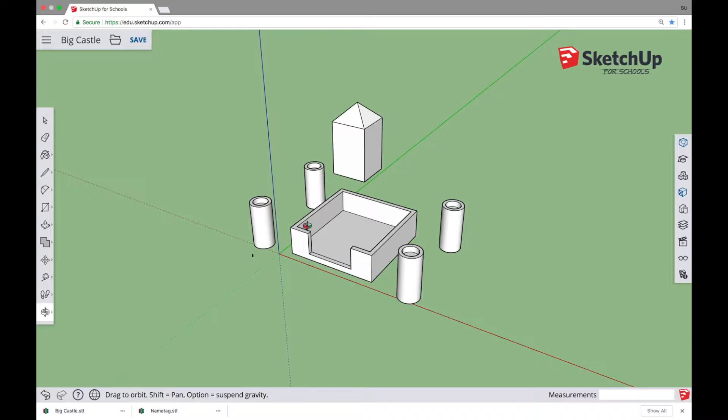Hello everyone. In today's lesson we're going to be drawing this castle. This castle is a little bit different than other models we've done in that it's a multi-part model. We're actually going to be drawing each individual part and then combining them together to make our castle so we can 3D print it.

In this lesson we're going to assume that you already know where most of the tools are and how to orbit and navigate comfortably. If you don't, you should go back and do some of the previous tutorials so you're comfortable. In this one, we're going to move right along and get to building our castle.

Let's do it. First things first, we're going to do a Save As and save this model, and we're going to call it Big Castle, and select a folder in your Google Drive to save it. This way we won't lose any work as we go along.

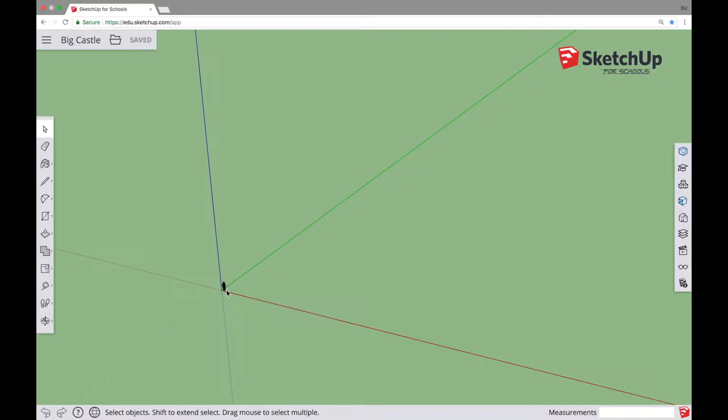Next, I'm going to start making the base for the castle, and we're actually going to make a pretty big castle, one that Temple could fit inside. So I'm going to zoom way out so Temple's really small. I'm going to get the rectangle tool here and click and release and draw a big rectangle or square and click again. We're eyeballing it here, but we want a castle big enough for Temple to fit inside.

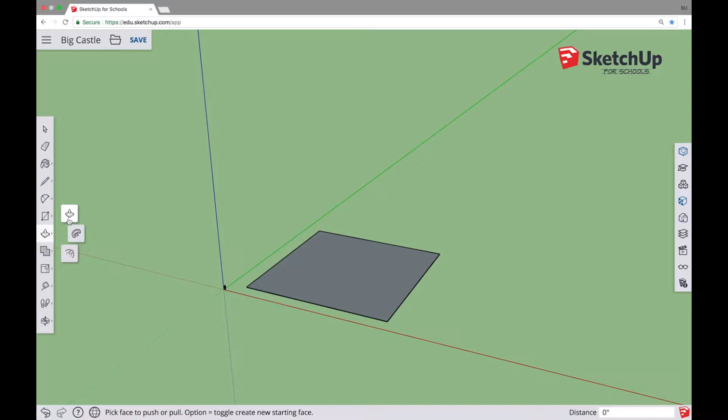Next, I'm going to get the push-pull tool and click and release on that rectangle that I drew and click again. That's going to make the rectangle that's going to make up the base of our castle.

Next, we're going to click the offset tool. We're going to go to the edge of the top of the rectangle, click and release, and click again so you offset a little line inside the castle.

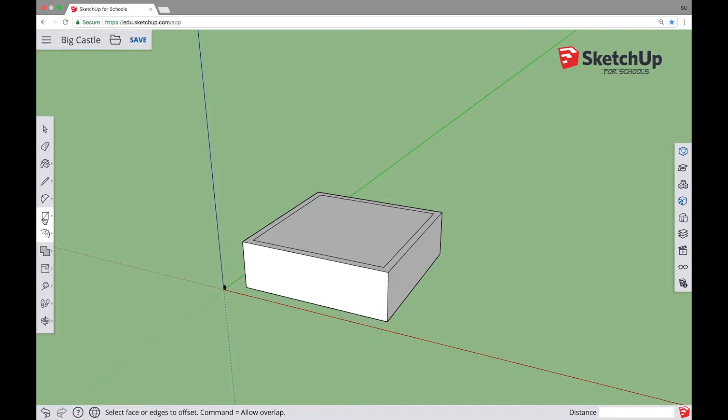After that, we'll go find the push-pull tool, click and release in the middle, and push down that top surface and then click again. You don't want to go all the way through, but go down a significant amount like you see here.

Next, I'm going to use the orbit tool, and I'm going to orbit so I'm kind of looking down at the top front of the castle like this. I'm going to combine the zoom and the pan tools to sort of move the castle in view.

Next, I'm going to take the rectangle tool and click and release in the bottom left corner of the top of the wall and the top right corner on the top of the wall to create a rectangle like this.

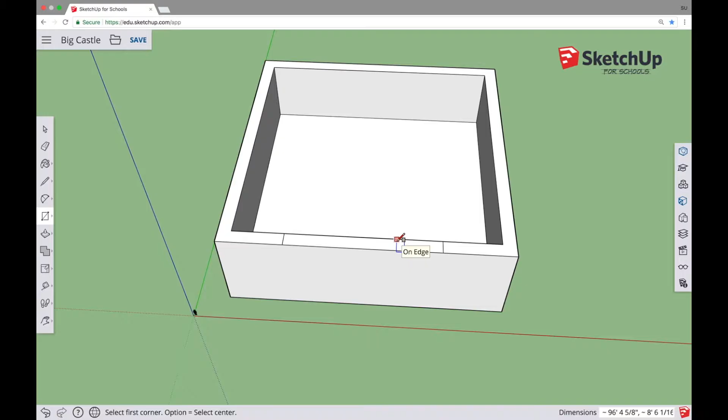Once I do that, I'm going to select the push-pull tool from the left side of the menu, click and release on that new rectangle that I just drew, and push it down as far as I can get it, just like you see here. This is going to create an opening in the front of our castle.

Next, I'm going to orbit our castle up a little bit, and then I'm going to go to the arrow tool or the select tool in the left side toolbar, and I'm going to click and drag and draw a box around our castle. I'm going to be careful not to select Temple.

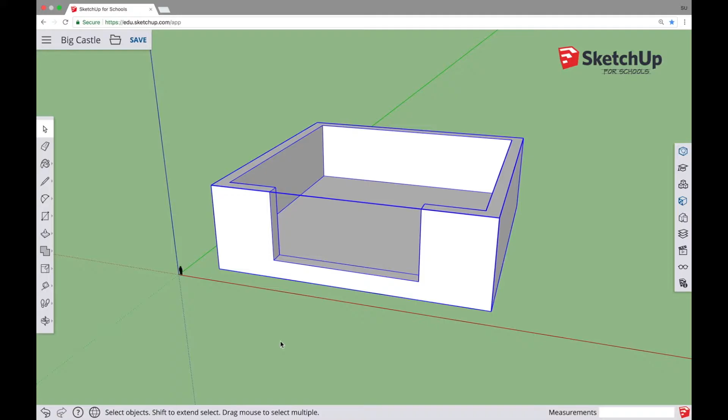Once I have the castle selected, I'm going to right or secondary click on the castle and select Make Group. Once I do that, you'll see that a blue bounding box forms around the base of the castle. That signifies that the castle is in its own group or its own sort of protected force field, and it's considered a separate part. Now we're going to go on making the turrets of our castle.

So I'm going to orbit up underneath the castle and then select the circle tool from the left side toolbar. After I do that, I'm going to click on the corner of the castle and release, and then click again to form the base of our turret as you see here.

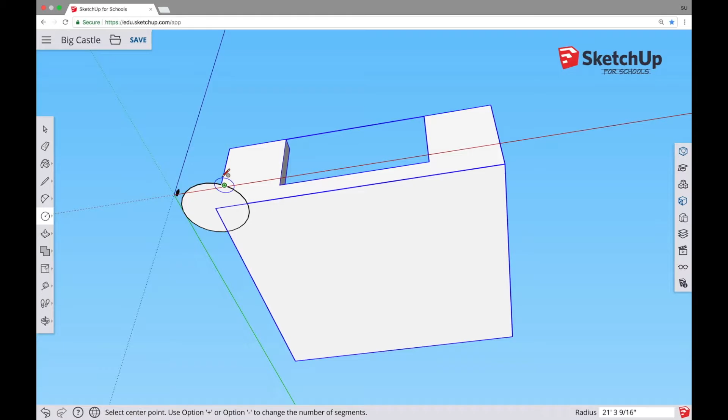After that, I'm going to orbit the model so I'm looking more down from the top of the castle. Next, we're going to find the push-pull tool, click and release on our turret, pull it upwards, and click and release again. Now we've got the basis for our turret.

In the left side toolbar at the top, click on the select tool. What we're actually going to do is click on Temple to sort of light her up, and then take the move tool, which you'll find in the left side toolbar as well, and click actually anywhere on the ground or right on Temple and just move her out of the way for this next operation.

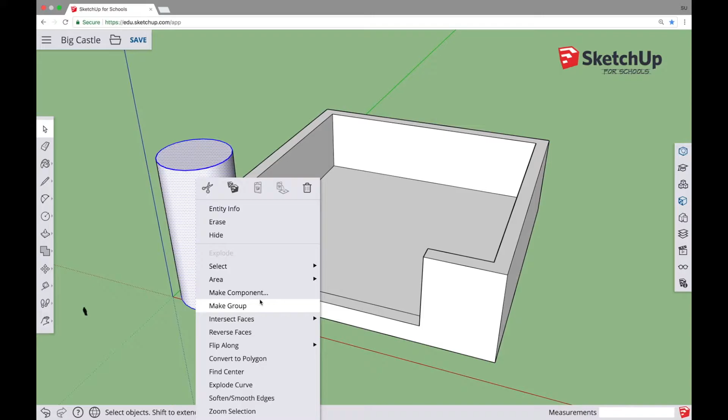We're going to click the select tool again and click and drag a box around our turret. We'll right click it and select Make Component instead of Make Group this time. When we do this, this dialog box pops up.

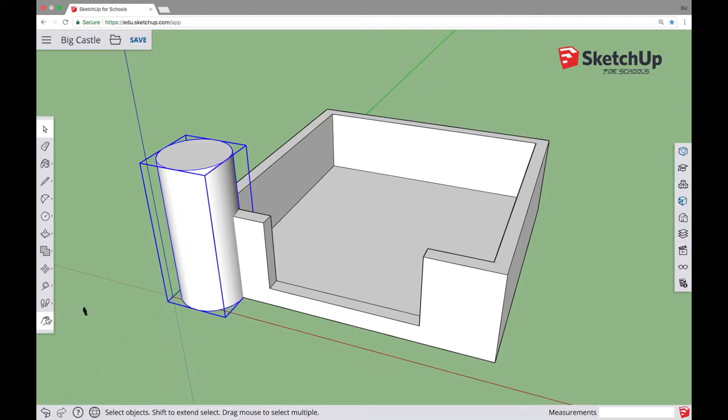You can name your component if you want, but you don't have to, and you don't have to worry about any of the other settings here. Just click OK. Now our turret has a bounding box around it as well, and this indicates that it's its own separate part. Next, I'm going to orbit the model so that we're looking up from the bottom.

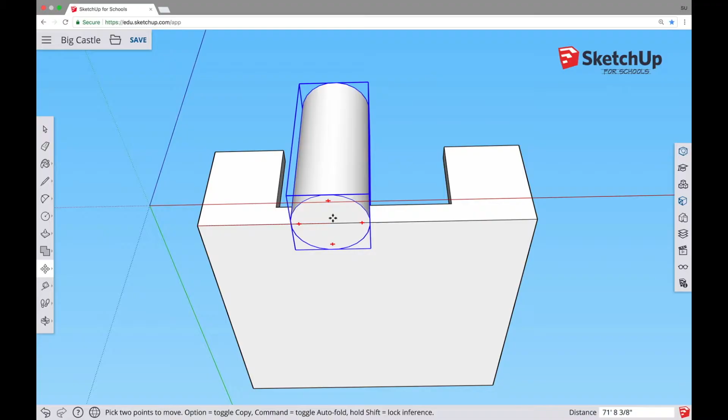The reason we're doing this is we're actually going to make 3 additional copies of this turret, and we're going to use the base of the castle as an easy way to position our turrets. So I'm going to click the Move tool with this turret highlighted and click in the left corner to start moving the turret towards the right side of the castle. When you're using the Move tool, you'll see along the bottom of the screen it says pick 2 points to move, Option equals copy, Command equals auto fold.

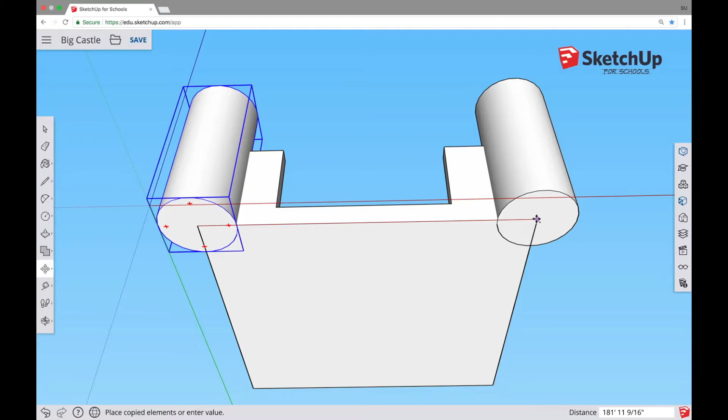Now I'm going to tap Option here on my keyboard, and you'll see what happens. It's going to leave the original turret, the one on the left, behind, and it's going to attach a copy of the turret to our mouse pointer so that I can then click it in the right corner of the castle and place it. So essentially our move tool also becomes a copy tool as well.

And we can keep this process going with our newly placed turret. Simply start moving it again, tap Option, and add another turret to the bottom right corner of our castle. Do the same thing with the Option key again, and you can put the last turret in place.

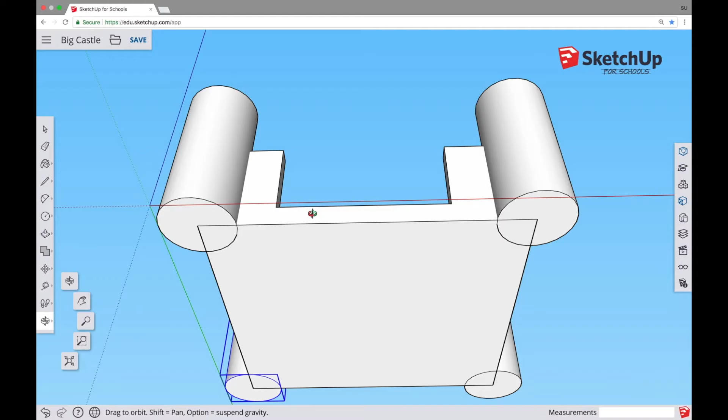We're going to click the Select tool from the left side toolbar and double click on one of our turrets. Once you do that, you'll see that the rest of the model kind of grays out, and we have this dashed bounding box around our turret. That means we're sort of inside the component and we're able to make edits to it.

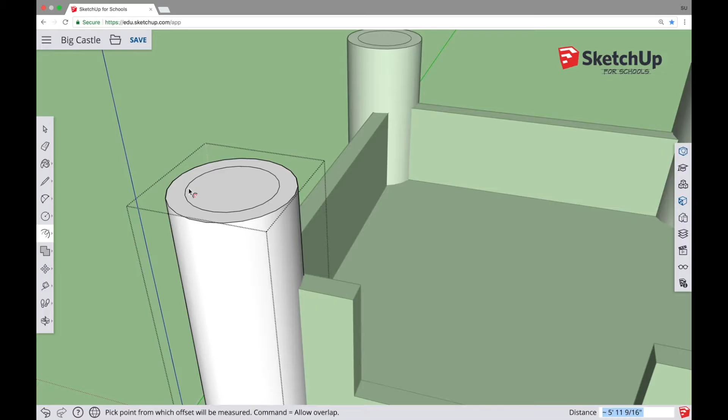So once we do that, we're going to find the Offset tool in the left side toolbar, click and release on the top of our turret, and click again to make a circle like this. Next, we'll find the Push-Pull tool in the left side toolbar, click and release on the top of our turret and pull it down like this.

Now you may have noticed something interesting happened here. You only push-pulled one of your turrets, but all 4 of the turrets changed. That's because before, we made these turrets components. No matter what you do to a component, every copy of that component in the model will change when you change one of them. This can be really useful when you're doing models that have multiple copies of the same thing, like the turrets that we have here.

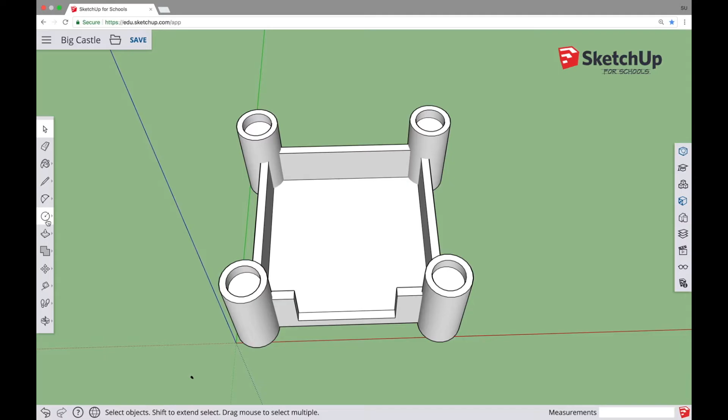Now for the last part of our castle, we're going to need a little house on the inside. To make that, we're going to take the Rectangle tool and draw a rectangle in the bottom floor of the castle like this. Next, we'll find the Push-Pull tool from the left toolbar, click and release, and then click again to extrude up our house.

Then find the Pencil tool in the left side toolbar. Click and release on one corner of the top of your house, and then click and release on the other corner. Do the same for the other 2 corners and make a crisscross pattern like this.

Next, find the Move tool in the left side toolbar. Take the Move tool and put it at the intersection of those 2 crisscrosses. Click and release, and then start moving your mouse up to get the roof to stretch up like you see it here. Once you get it where you want it, click again to set it in place.

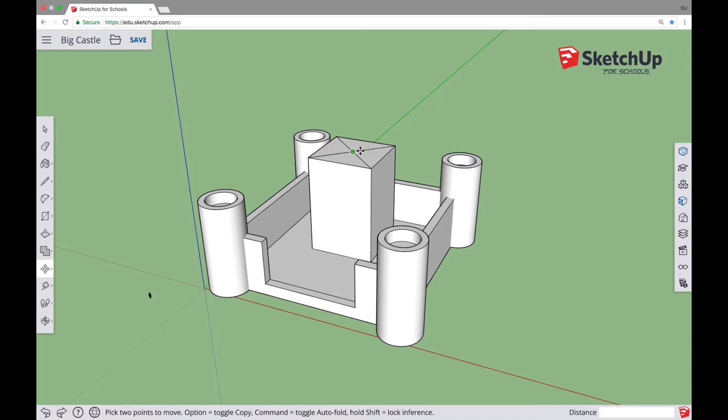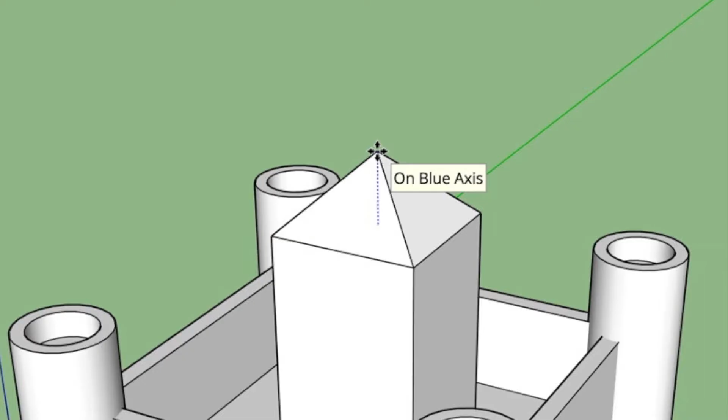Now this is a place where it's pretty easy to make a mistake. You can see here I'm trying to move the roof upwards, and if I'm not paying attention to the direction that I'm doing it, it can result in a roof that looks pretty bad or flat like this. What you really want to do is when you're moving it up, make sure it says on blue axis on your cursor. That's telling you that you're moving up. You can sort of think of blue as pointing towards the sky. So as long as you see that on blue axis, when you click again, you'll be all set.

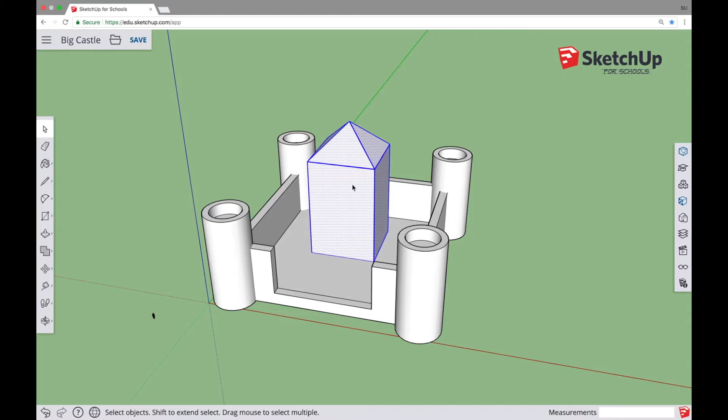Now, the next thing we need to do is take this house that we've drawn and put it into a group so it can be treated as a separate part. To do that, find the Select tool, which is the arrow tool in the left side toolbar, click and drag to draw a box around the house. When you get it highlighted like this, right-click it or secondary click it and select Make Group. Once you do that, you'll see a blue bounding box around your house like this, and that shows you that you successfully put it inside of a group.

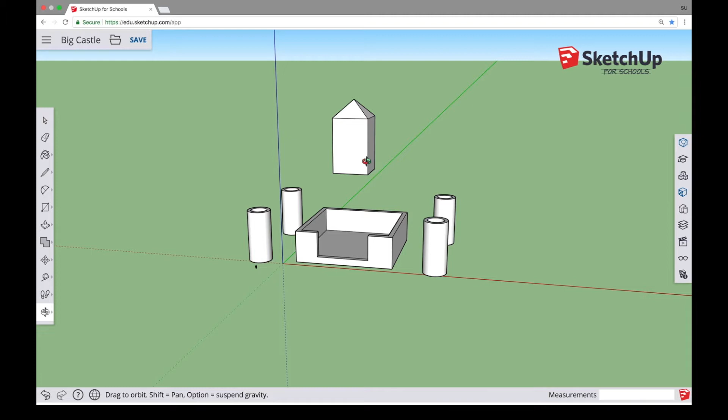Remember what I said earlier about modeling this castle as different pieces? Well, we've been doing that all along. Our turrets are 4 different components, the base walls of our castle are a group, and the house is a group as well, which equals 6 distinct pieces that make up the castle.

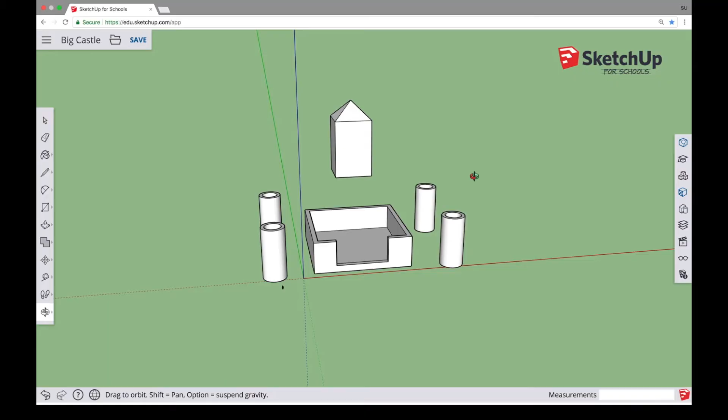This is a great modeling technique because it allows us to copy and modify things as we model, but not so great for 3D printing. So one of the last things we need to do before we 3D print this castle is combine all of these parts into one part so it can be used in 3D print software. To do this, we need to select all of the parts that make up the castle.

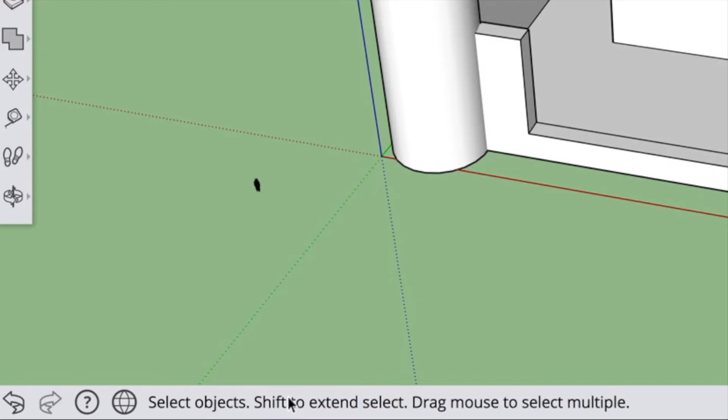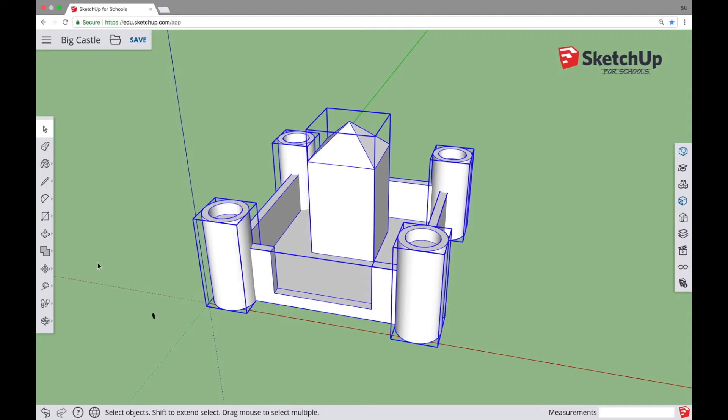We're going to find the Select tool from the left side toolbar. Before we start selecting, let's look at the bottom of the screen, where it says Shift to extend select. We'll use the Shift key to individually select each part that makes up this castle. Hold down Shift and click on each turret, the base walls, and the house. As you click each one, they light up blue. When you're done, let go of Shift and the mouse, and all the parts of your castle should have blue bounding boxes around them like this.

Next, with everything selected, find the Outer Shell tool from the left side toolbar and click it. Immediately, all the parts of your castle are combined to make one part. So now your castle, instead of being 6 individual parts, is one part which we can send to our 3D printer. We can check this by clicking the Entity Info button on the right side toolbar at the very top. You'll see it says this is a solid group and has a volume, and when something has a volume, that means it's a watertight 3D printable model.

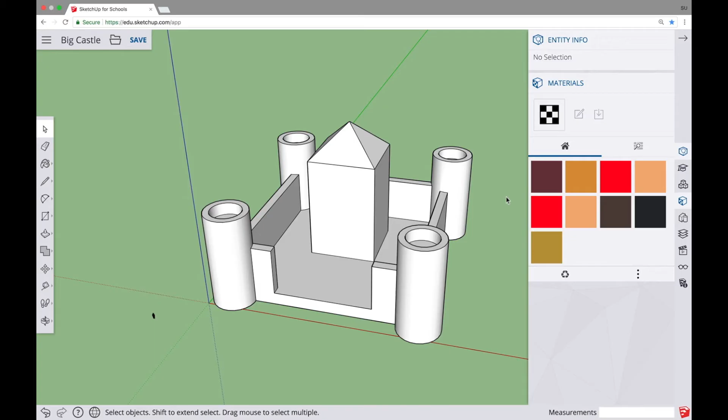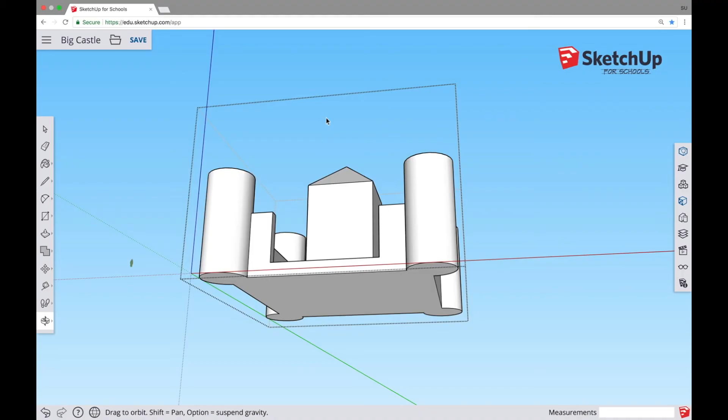With the Select tool, double-click on your castle. That brings you inside the group, as we can see from the bounding box and the fact that the rest of our model is grayed out. Orbit underneath the model and find the tape measure tool in the left side toolbar. Click and release on one side of the castle, then click and release again. You'll see the cursor tells us our castle is 224 feet wide.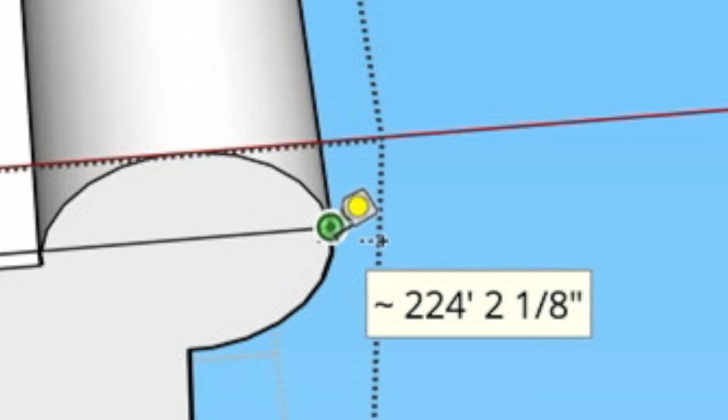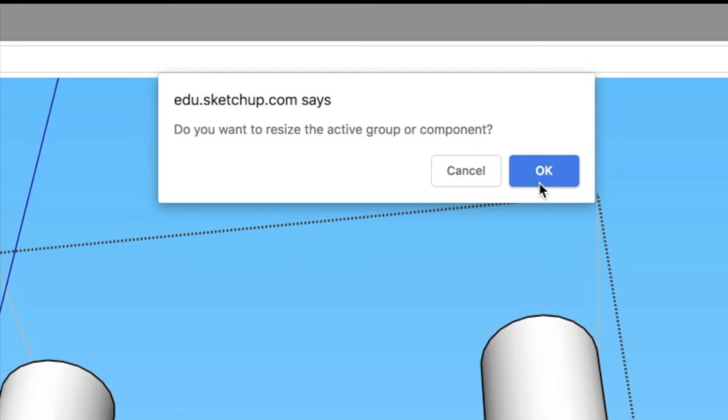That is far too big for a 3D printer, but luckily we can easily change that with the tape measure tool. When using the tape measure tool, in the bottom right hand corner of the screen you'll see a small box that says length. Type in, without clicking in the box, 3 inches and press enter. A dialog box will pop up near the top of the screen asking if you want to resize your model. Press OK and look what happens.

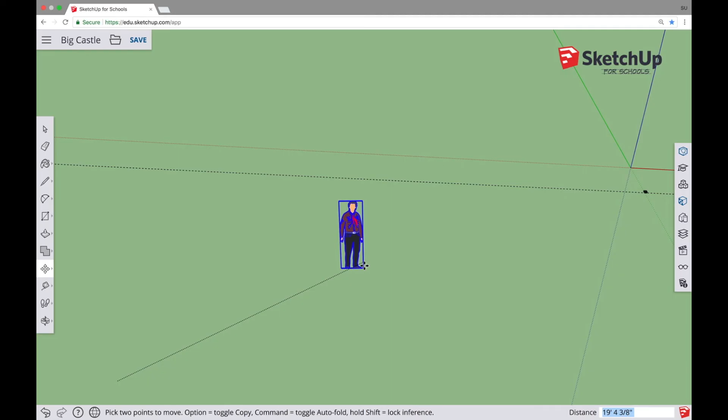Your model gets so tiny we can barely see it. If you go to the toolbar on the left side, underneath Orbit, you can find the Zoom Extents button and click it. That will bring Temple and your little tiny castle model into view. If you take the Move tool, you can move Temple closer to your castle, and either zoom in manually or press Zoom Extents to get Temple's foot and your castle as close together as possible.

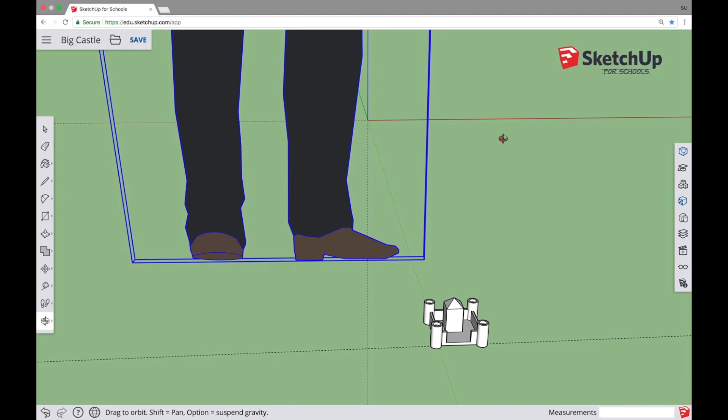You can see here that your castle is about 3 inches wide, which is what we typed in. If you look at it in comparison to Temple's foot, you can confirm it's about 3 inches wide. I'll bet your foot and your 3D printer bed are about the same size, so if you compare the castle to the foot, you'll know this will actually fit on your 3D printer bed.

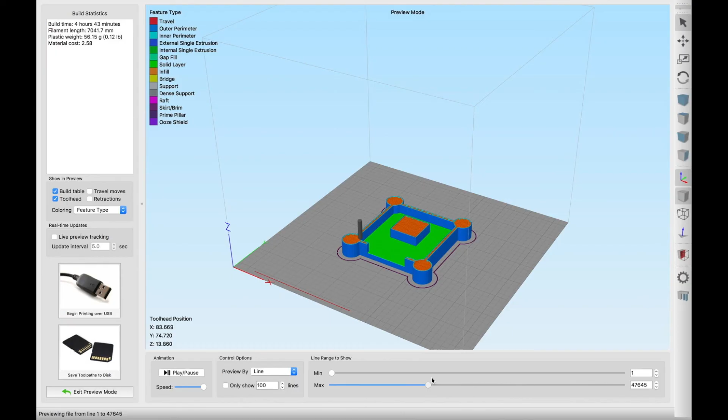The last step is to export the file to STL, load it into your 3D print software, and prepare it for printing. To get your STL file, go to the File folder, select Export, then select STL. After that, just load the STL into your 3D print software and prepare it. And that's it, you've designed and prepared a castle for 3D printing. Congratulations!